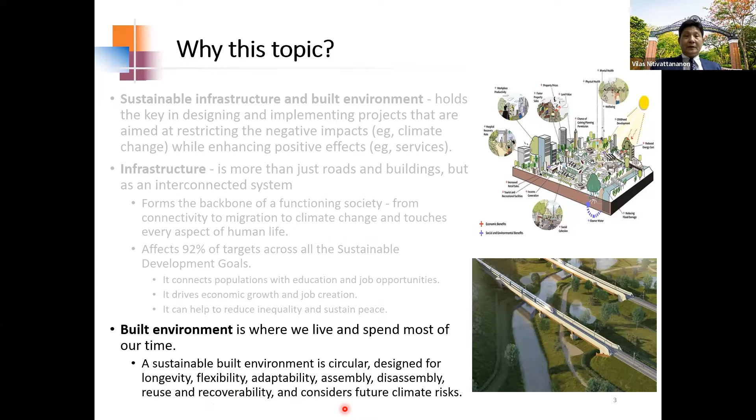Some of this we can cover in today's talk, but obviously we could continue to link into any of these holistic linkages. These are some examples which might be good to see, where the picture here can provide the meaning.

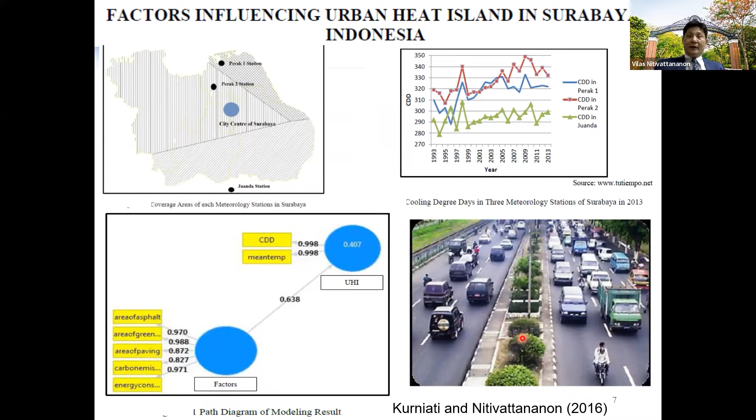This research is a master's thesis of our student, published in 2016, which also turned into possible measures utilizing this understanding of the strong relationship. Like in the picture here, increasing the green area, including in the middle of the road, could contribute to less risk from the urban heat island in the city.

The second part I'd like to cover is about the situation and trend. We may look at this from different angles, criteria, and indicators. But the simple way I like to offer here starts from the first group, which we call the driver or the pressure. Some analyses might separate this, but I try to simplify it: what would be a key driver and pressure regarding sustainable infrastructure and the built environment?

To summarize, I see that there are different types of risks, coming from basic natural disasters, but some of these could also be contributed to by human activities, including climate change related risks. We can also look at the second group, socio-economic development, which could affect infrastructure and the built environment, from basic GDP and population change, to the dynamics of an aging society.

The next group is more about the pressure regarding urbanization and land use change, particularly the built-up environment and space, which is strongly related to infrastructure. The last part is about changing demand and challenges in terms of funding. These are big topics in terms of increasing diversity of both demand and funding challenges and opportunities.

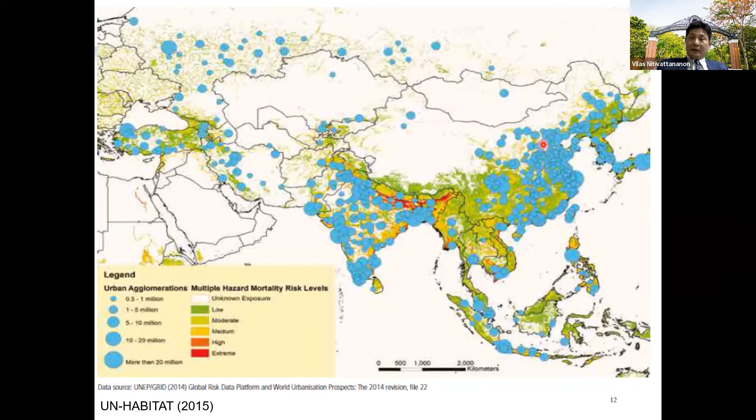Similarly, if we want to link this type of risk—what we normally call hazards—this is actually multiple hazards, and how they link into the spatial distribution of cities or urban centers. That's another way to look at it, because in at least some parts of the world, and many in Asia, we see more urbanization and growing mega cities. But at the same time, some areas could be exposed to higher different types of hazards, turning into possible risks, particularly in South Asia and many parts of East Asia.

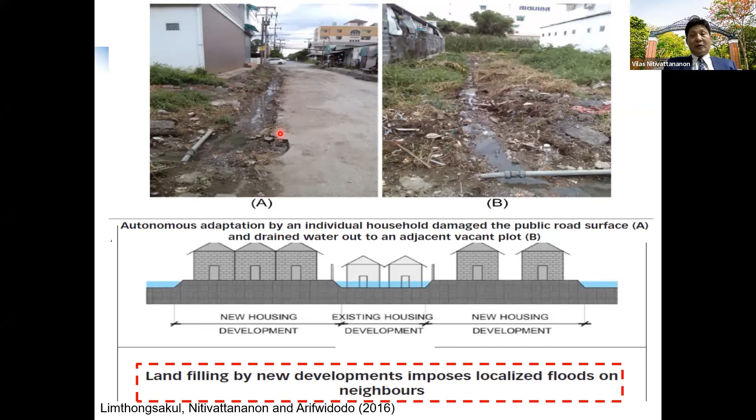Then let me move on to the second part of the talk.

We very much need an approach which I focus on, what we call the system approach, in order to link different goals mentioned before. We have a total of 17, but we can even look at a few of them and how to link them.

Also from the infrastructure system, from multiple scales or user levels, including policy, plan, program, and project. Another part that is becoming more emerging is what we call the trans-disciplinary and holistic approach, to look at both vertical and horizontal types of integration.

There are some specific approaches and methods which are widely utilized. For example, eco-efficiency, cost-benefit analysis, multiple criteria analysis, life cycle assessment, ecological footprint assessment, sustainability assessment, strategic environmental assessment, environmental impact assessment, or social impact assessment. These are some good examples, and I hope there are different publications or examples the audience could also look at.

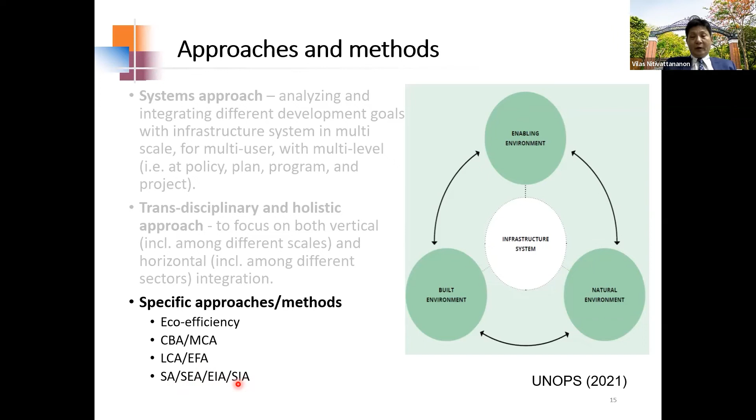These three are quite important, maybe a bit different terms from different references, but we need this in order to deal with the management and development of the infrastructure.

Another example here, I'll quickly go through. This is a very nice framework to look at, from multiple scale, from the larger city or region, to the neighborhood, district, smaller site, or block.

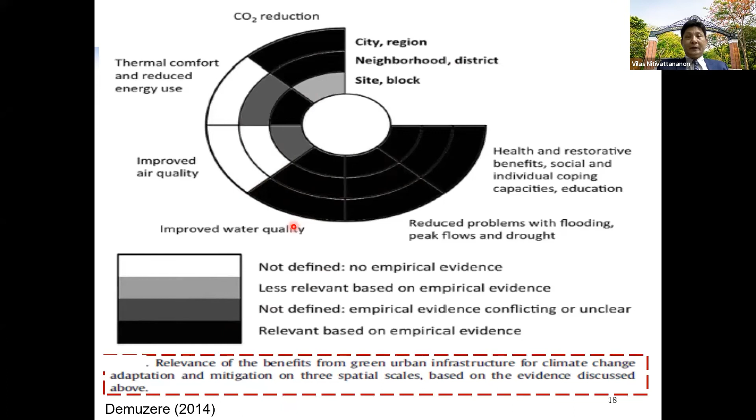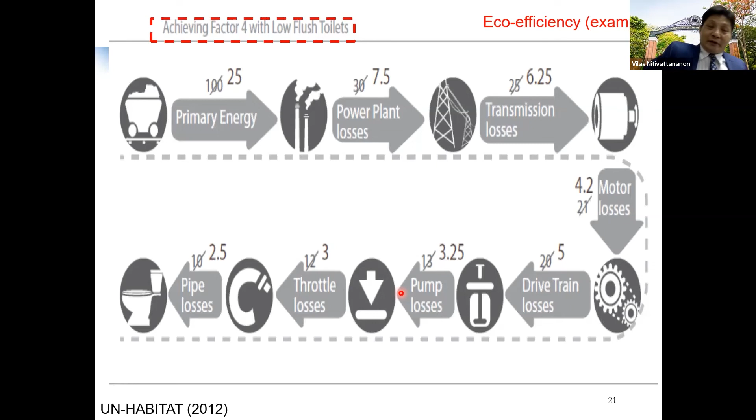I mentioned eco-efficiency. This provides a quick example in case some audience might not be familiar. We normally look at eco-efficiency in a simple way we call achieving factor 4. Some colleagues want to achieve a larger factor like 10 or more, but factor 4 is somewhere that could be quite practical.

This series of components in basic water supply links to energy and power transmission, and gets into very basic types of pumping and piping. Any of these elements can be looked at from the eco-efficiency point of view. In other words, if we can increase the eco-efficiency by a factor of 4, we have quite big potential in terms of the combination.

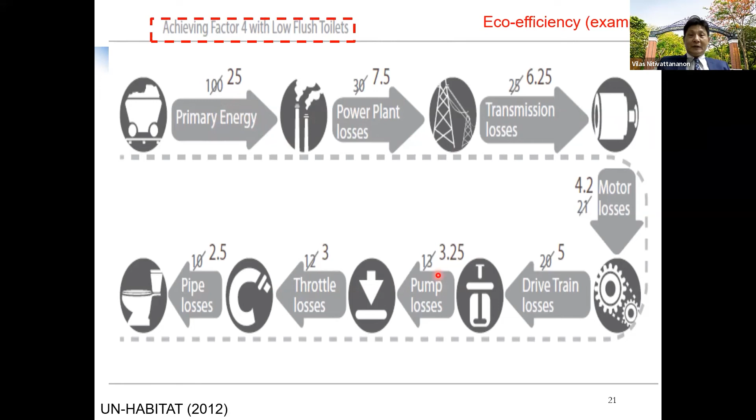This is another way to understand how the different phases of infrastructure development, from planning, preparation, procurement, to implementation, operation and maintenance, could include a number of tasks which we could look at almost one by one, and also require specific decision making.

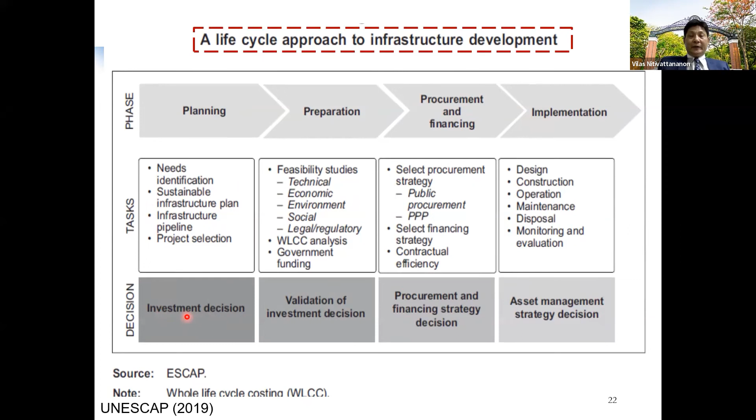Each of these has a potential, depending on the professional, which is how I'll end my talk, about the role of the professional in different stages of infrastructure development. We call this the life cycle approach.

One quick example: we are working on a project called appropriate costing for climate adaptation of road and related infrastructure projects in Cambodia. The idea is to be quite holistic, maybe trans-disciplinary, from economics to climate change to infrastructure, in order to understand better how we do costing for climate adaptation of this infrastructure, so this can be used to develop guidelines and go into pilot implementation or more practical implementation.

I will not go into detail, but this is based on earlier work with a good understanding of the road development cycle. Along this cycle, we try to understand how each specific activity, from basic surveys, design of the road, to construction, to operation and maintenance, including termination, could be looked at from the adaptation cost perspective. That means we need to look at adaptation from the earlier stage to the later stage.

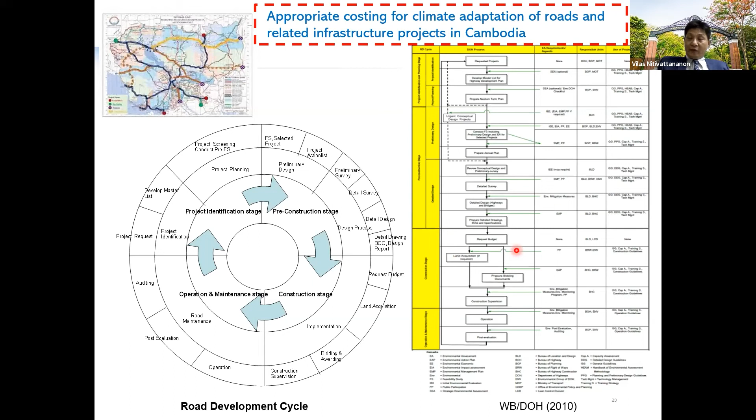Any of this can possibly be converted into monetary terms, so that we can use this as a common platform to deal with decision making.

Now let me offer a summary of the challenges and opportunities. I don't separate these two, but any of this can turn into either a challenge or an opportunity, which many already mentioned in the earlier slides.

Let me summarize. Some of these could be important from a geographical scale, like the region, to the country, to the sub-national, to the local level. There is both opportunity and challenge regarding this.

Also the temporal scale, at least short and long term. There are different sectors, not only infrastructure itself, but different urban and other sectors to be connected. We also need to look at stakeholders and users. The next few slides show examples of how this is important.

Different functions, as I showed in the recent slide, about this different function or benefit and also on the cost side. More important is the development phases from planning to design. Then any of this, from challenge and opportunity, can look into both interaction and synergy or dis-synergy.

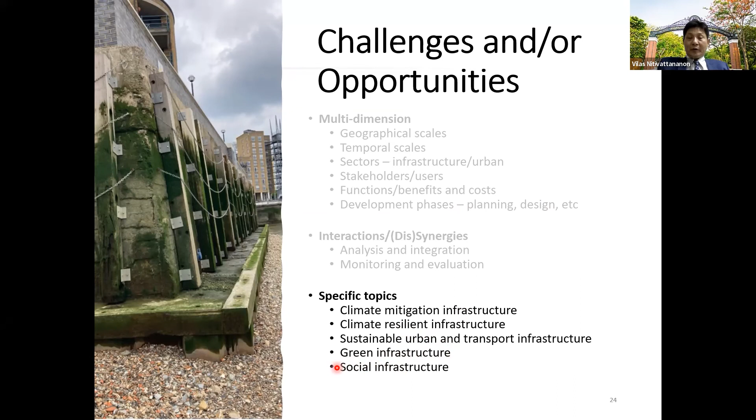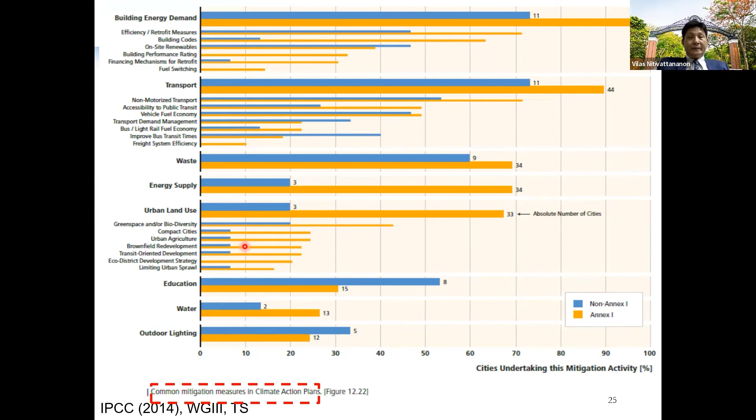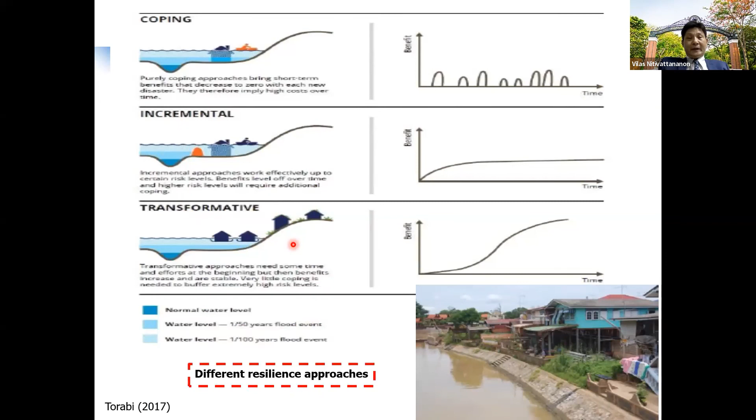Let me go through quickly some examples. This is from the IPCC report, collecting records from different cities on how they utilize the idea of climate mitigation in different sectors. This supports the earlier slide on the allocation of different infrastructure from climate change adaptation. From resilience, we have options from very basic coping to incremental to what we call transformative. Each could have pros and cons, but there is ongoing research to see maybe some combination or selection of these different approaches to resilience.